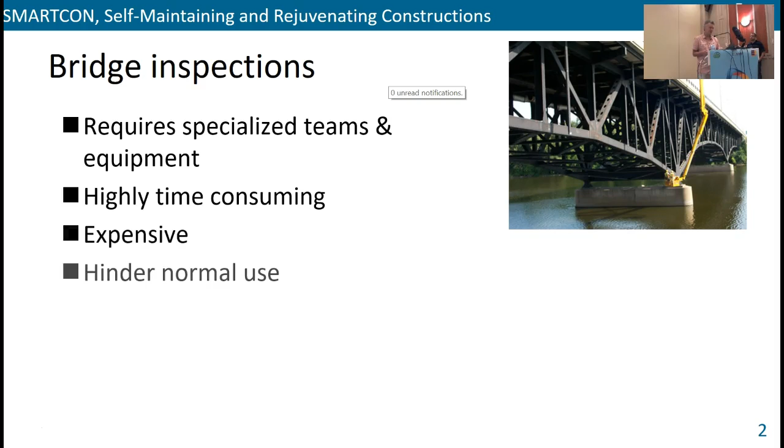Now, we are all familiar with the problems of bridge resilience and the bridge inspections necessary to keep them in good condition, but this requires specialized teams and equipment. It costs a lot and hinders normal use, and so on. This even leads to huge problems, even collapses of bridges.

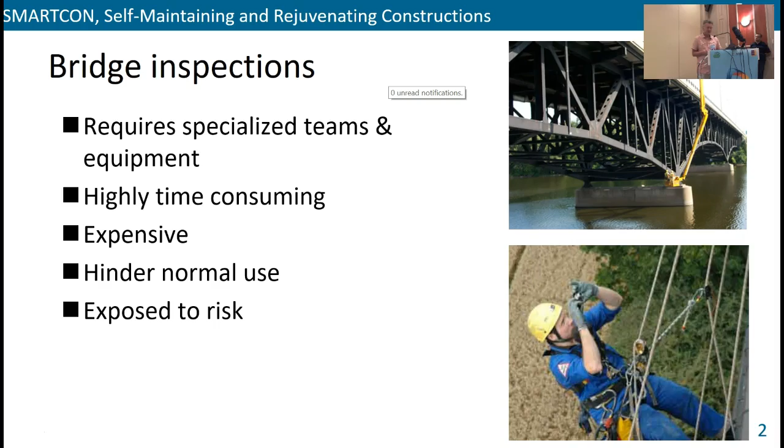So it's no wonder that quite some research has been put into improving this state. There have been solutions, including drone fleets and all kinds of approaches.

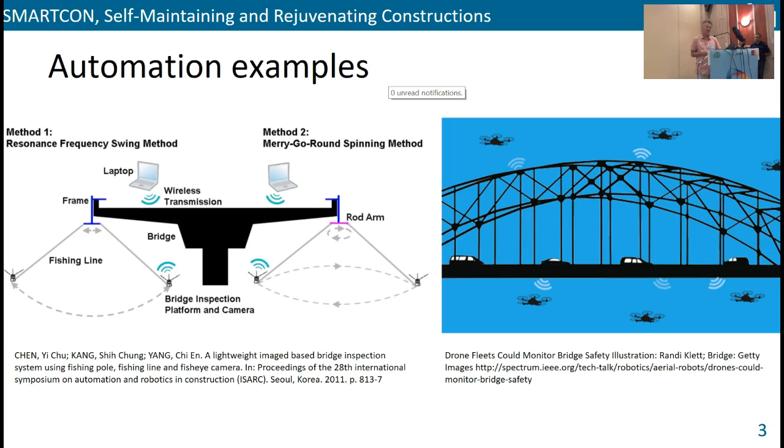Now, we were a bit more ambitious, and SMARTCON has a goal to really transform passive constructions into something smarter, structures that will be able to take care of themselves, so to speak.

And for this we want to use swarms of robots, using biomimetics — good examples of how animals behave. These biomimetic swarms of robots should live with the bridge or any other infrastructure and continuously inspect, analyze the inspected indicators, decide what to do next, how to repair, maybe call someone, or even do something by themselves to rejuvenate the building.

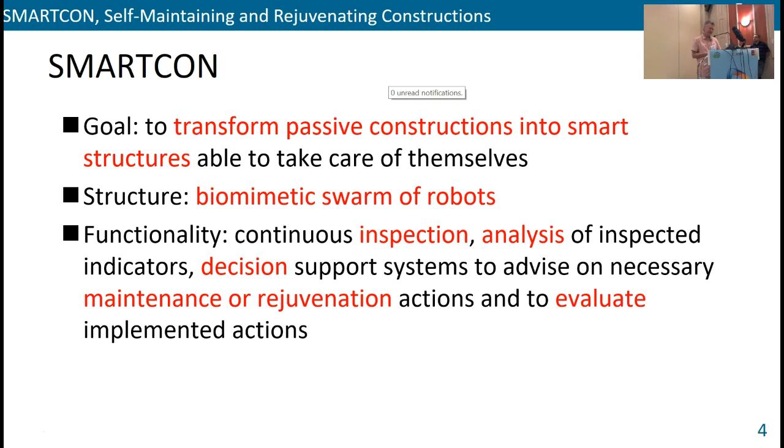The rejuvenation was probably the too-ambitious part. So rather than looking only into existing solutions — of course we did review existing attempts, mainly with robots and other approaches —

we also looked into the world of nature, looked at mobility, which to our thinking is one of the big problems for robots — how to really be able to get to every part of the structure.

So there were some different possibilities how to solve this, or what to look at. We looked at geckos and their ability to climb walls and ceilings using the van der Waals forces.

These are the forces between molecules, and geckos have developed this perfectly. However, there are problems involved — they have to lick their feet from time to time to get close enough to those molecules on the wall, and things like that. But it's very impressive.

Also, there were projects that mimicked this behavior. And of course, there is flying.

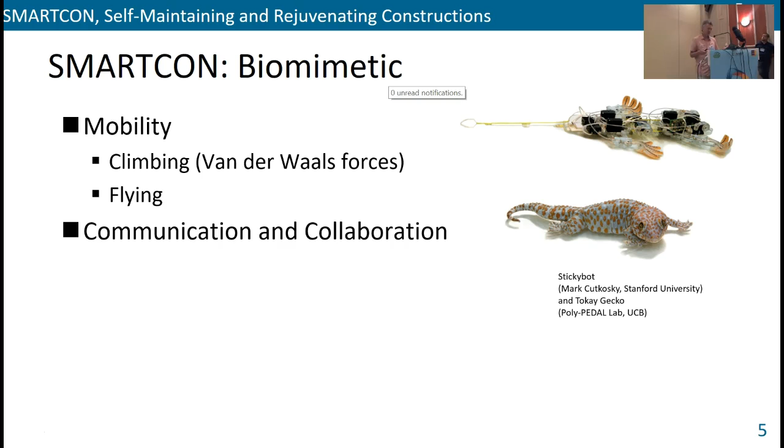And we looked at swarms of animals. Of course, there has been lots of research done in this area, like termites, how they build their structures, how the communication goes on. Therefore, we have biologists in our team.

And yes, there have also been some quite interesting projects and prototypes developed regarding the swarm activities of robots.

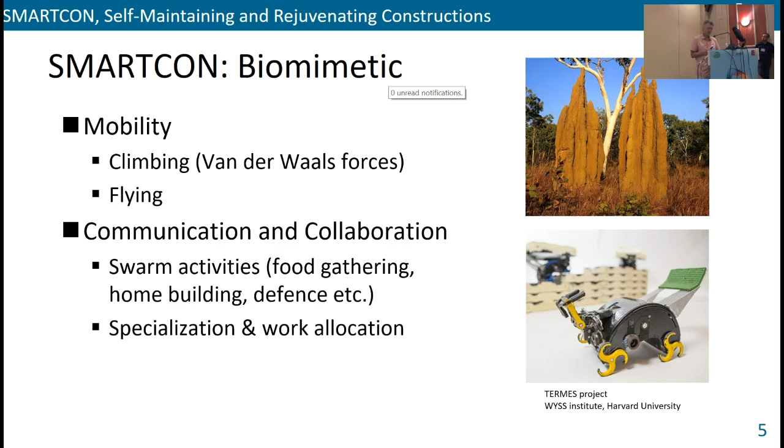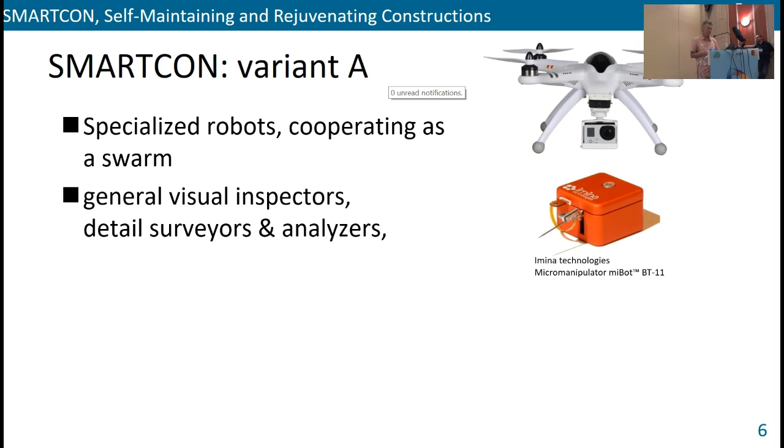And finally, we had to decide — there are two possible ways to go further. One possibility is to use specialized robots, where some would act as general inspectors fitted for this job, and others would be like repair robots.

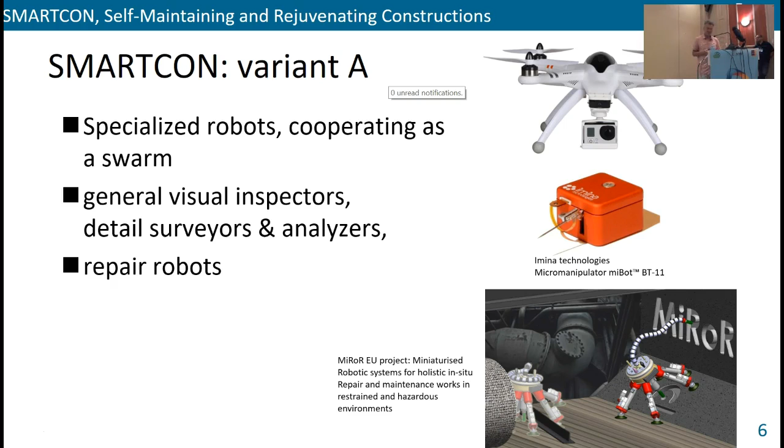And of course, we looked at research in this area, and there are various ways researchers were going. The other way is to use some kind of transformers.

Maybe you've heard of cubelets — cube-like robots that are able to combine their functionality in different ways and be whatever you want them to be, functioning in a specific way.

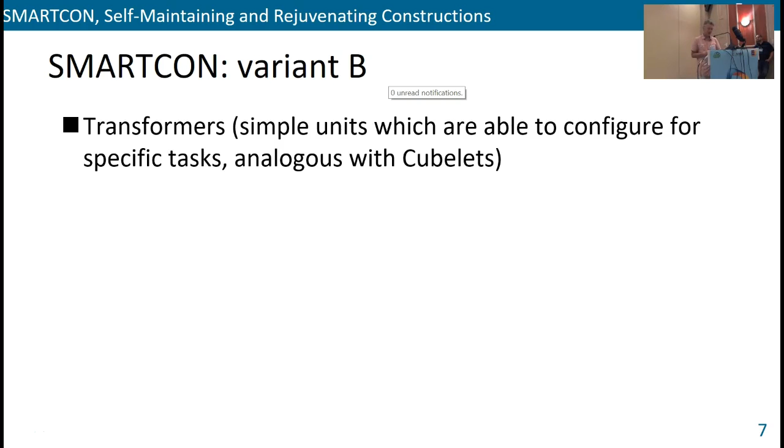And this prototype was able to climb a concrete wall using holes left from scaffolds, and yeah, it was successful. But this was all that prototype actually did.

We also thought of rejuvenating the structure, meaning the robots' basic bodies would also be used as part of the structure. This would be primarily used in urgent cases to prevent collapsing.

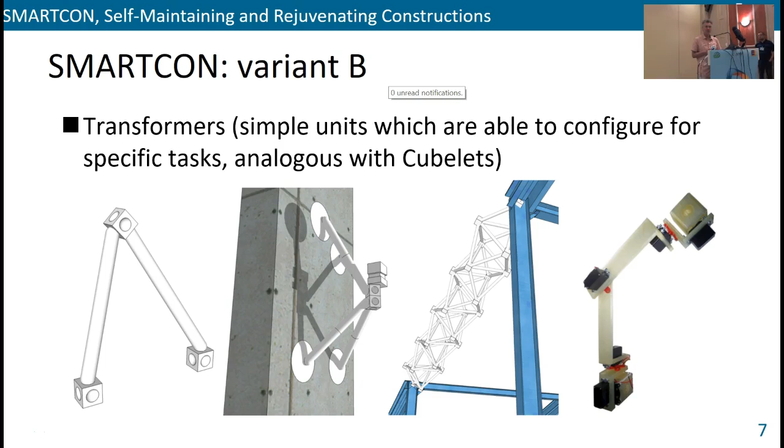I would rather use the rest of my time for something different. I would like to focus on automation in our sphere of architecture, engineering, and construction, let's say by 2030.

Due to progress in various fields, we can probably expect tremendous changes, specifically due to the development of artificial intelligence, robotics, and so on. So technologies are really developing fast.

My question would be, how do you feel about that? More focused — what effects of increased automation on the AEC sector can we expect by 2030? And I'll give you three possible answers.

One would be: there will be some more or less significant effects on how AEC operates, meaning companies as they exist will think it over and adapt — a gradual development, one could say. The other would be: the sector will have to seriously rethink their business. And third, a more radical option: the whole sector will change into something completely different.

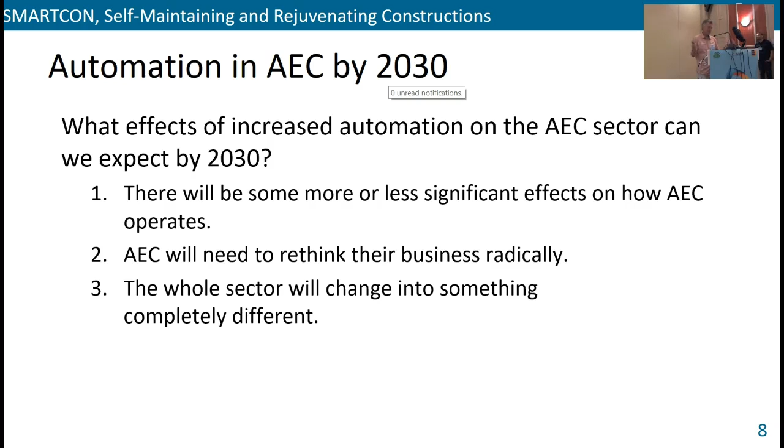I will now click on the results here, and then we will be able to follow the results. It should show up here, right? I'll do my answer as well, so that you can see. Vote — so you got the poll. It should be synchronized. Is it? Do I have to refresh it all the time?

That's funny. In my case, it is showing that something has changed. Yeah, right. I think I need to go to the final. Yeah, it's showing something. I'm sorry for that. Okay.